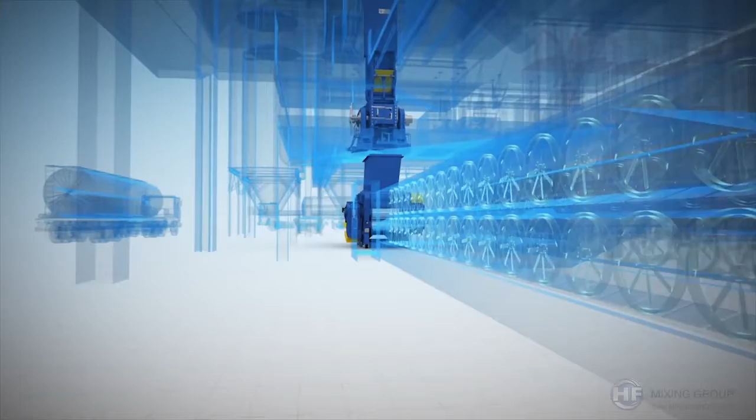In today's business world, only the best technology will ensure you stand out from the competition.

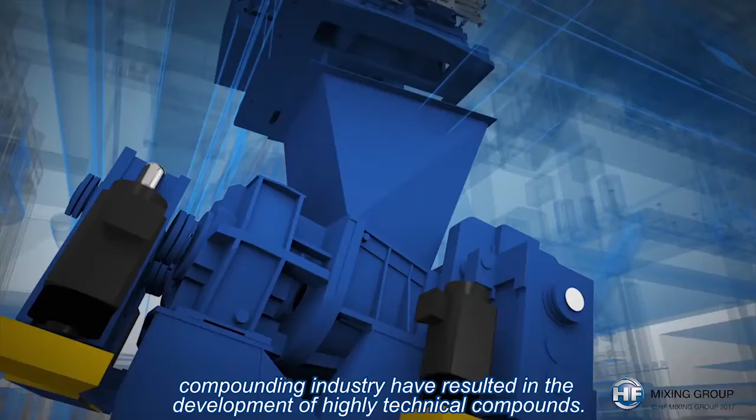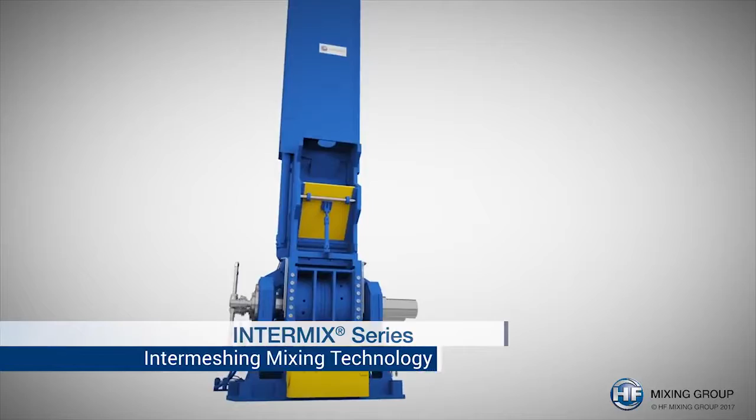Since the internal mixer was developed in 1916, the demanding requirements of the compounding industry have resulted in the development of highly technical compounds. HF Mixing Group continuously developed the Banbury, Intermix, Tandem, and Universal Mixer U-Mix to ensure that these compounds can be produced to a consistent high quality at the lowest cost.

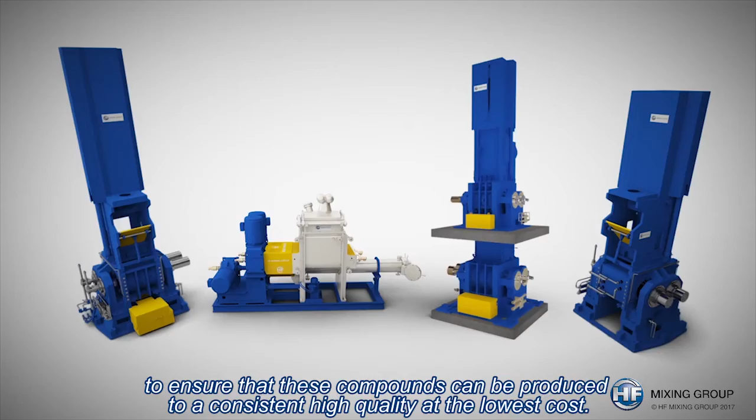HF Mixing Group aimed to give you a total solution for your mixing room requirements, from the best equipment for each individual step of the process through financing, project management, project engineering, integrated automation, and site coordination.

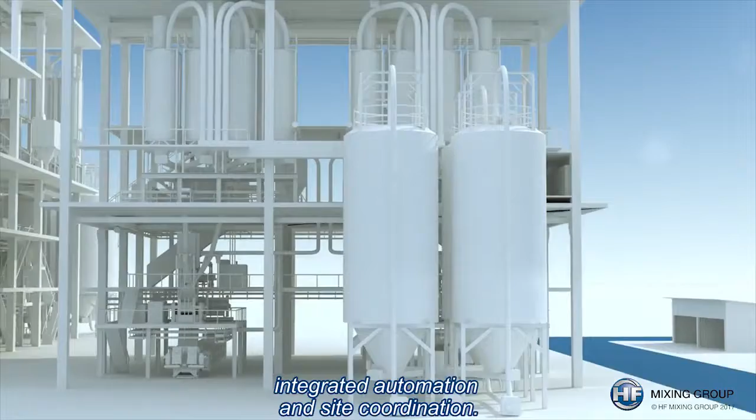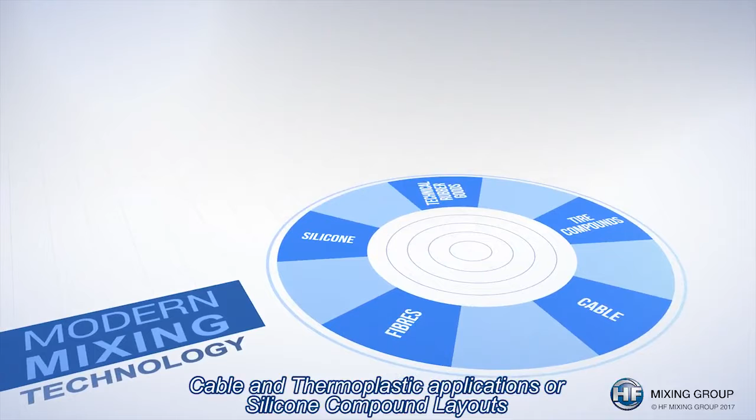Whether for the tire industry, technical rubber goods, cable and thermoplastic applications, or silicone compound layouts equipped with universal mixers, the central point of any mixing room layout is modern mixing technology.

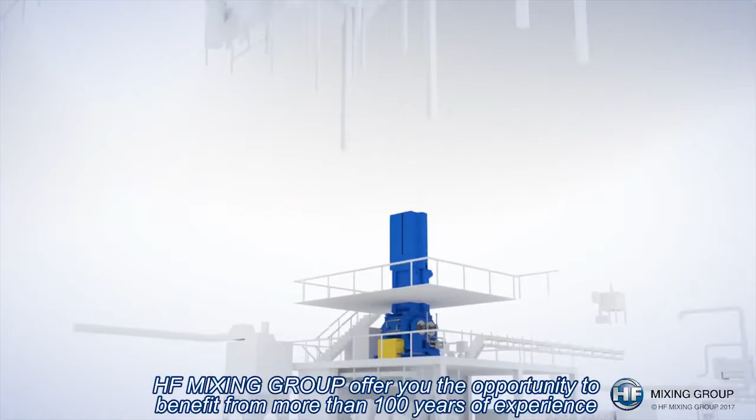HF Mixing Group offer you the opportunity to benefit from more than 100 years of experience in building the heart of mixing procedures, the mixer.

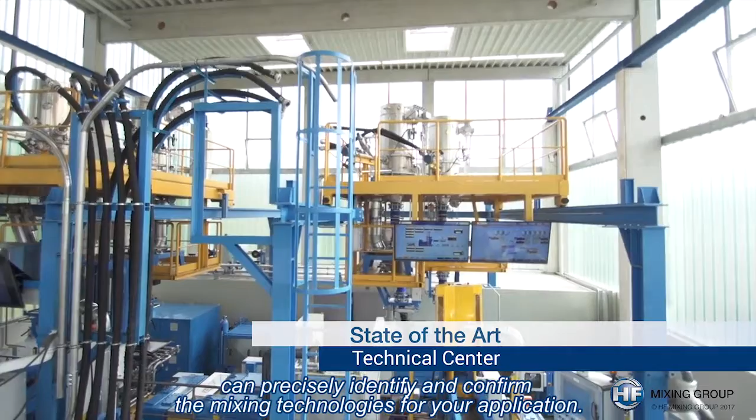Our state-of-the-art technical center in Freudenberg, Germany, based around production-size scalable equipment, can precisely identify and confirm the mixing technologies for your application.

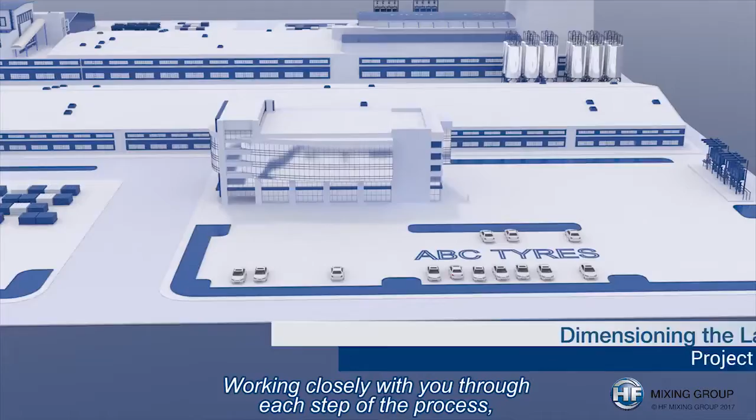Working closely with you through each step of the process, from raw material delivery to finished compound, number of passes and the respective volumes for your materials, we can identify the individual machine parameters and size the mixer, as well as the complete mixing room.

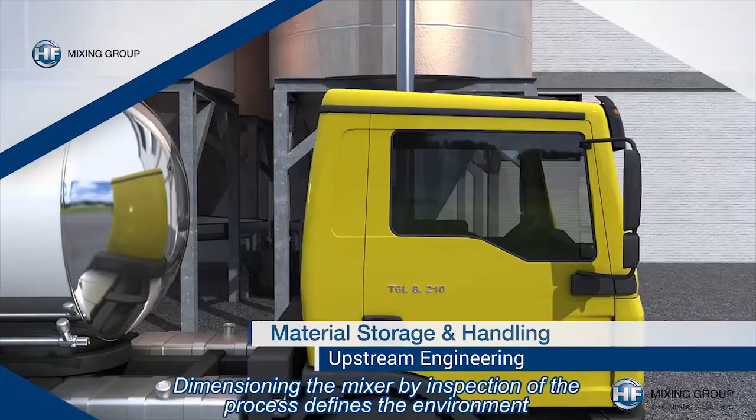Dimensioning the mixer by inspection of the process defines the environment and the specific requirements for up and downstream equipment. Each process, whether in advance or subsequent to the mixer, should be limited by the frequency of mixing.

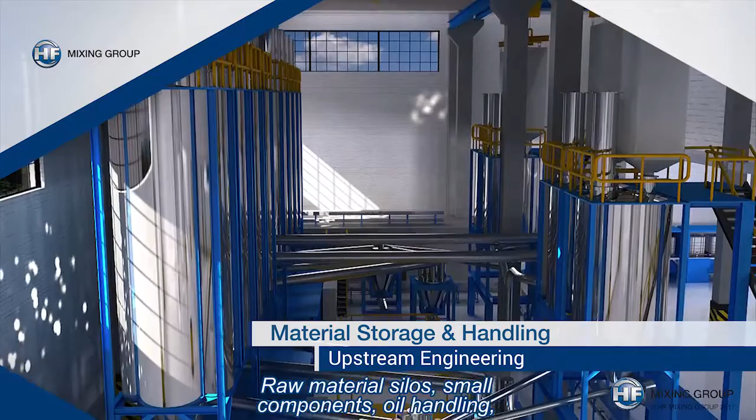Raw material silos, small components, oil handling, weighing and feeding of polymer bales or master batch compounds. The aim of upstream engineering is to analyze the characteristics of the different raw materials and to determine the best solution for a careful raw material handling system.

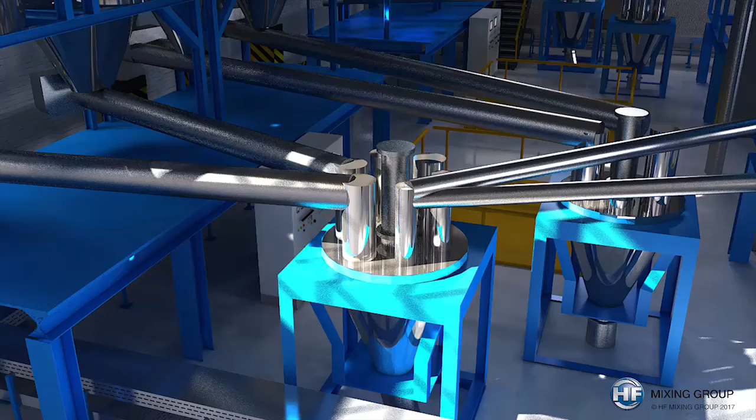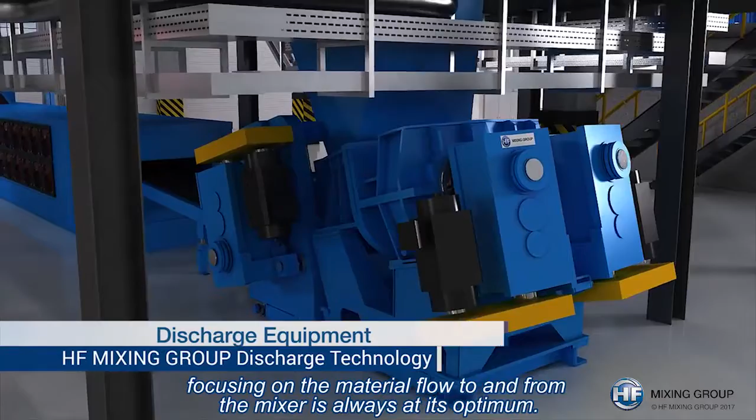Dimensioning of upstream equipment by inspection of the mixing process provides the basic demands for the downstream equipment, focusing on the material flow to and from the mixer being always at its optimum.

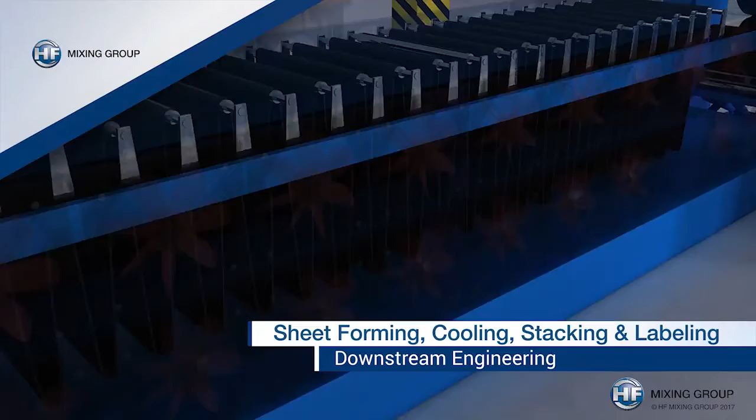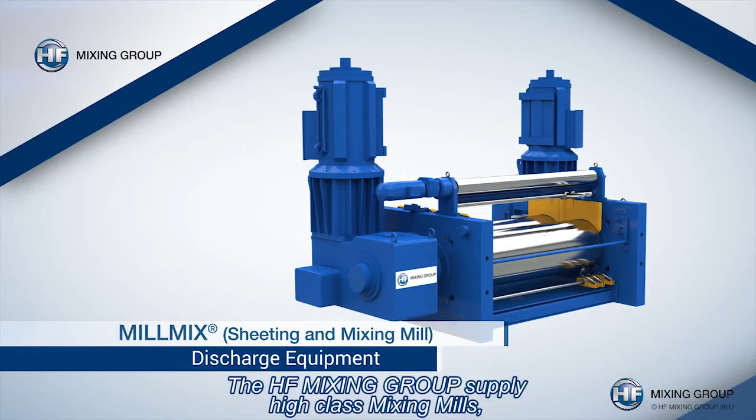HF Mixing Group supply high-class mixing mills, twin and single-screw extruders, batch-off units, and pelletizing solutions to guarantee the required quality for further compound processing in the downstream area.

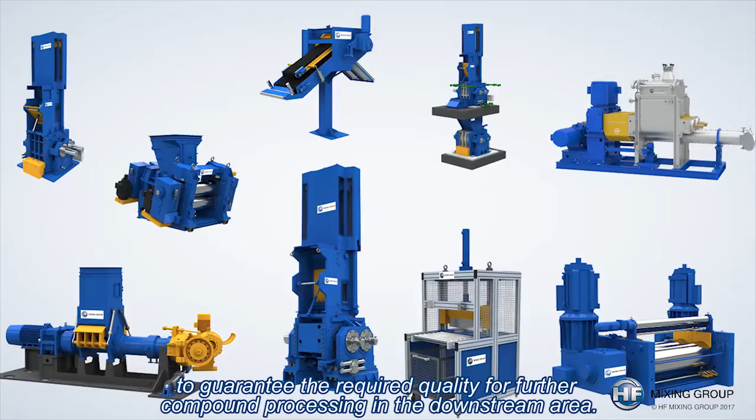Once the equipment has been correctly sized and the process flow has been determined, we can look at the line layout in 3 dimensions so that the process can be easily understood by everyone involved.

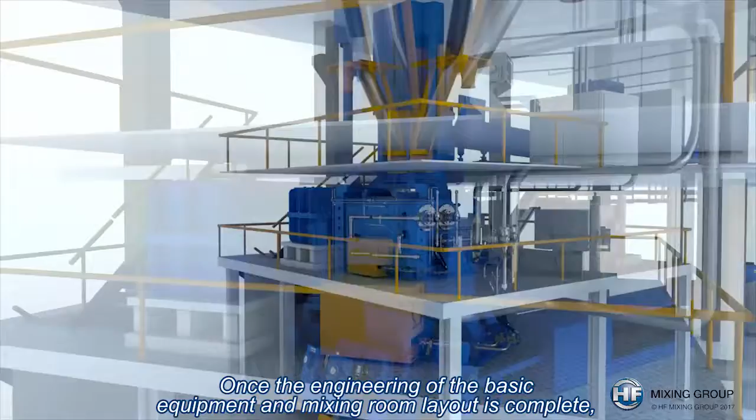Once the engineering of the basic equipment and mixing room layout is complete, we can start to look at engineering the cable trays, water, air and lubrication pipework, dust extraction, and venting systems. The basic engineering work linking each aspect of the mixing line is now complete.

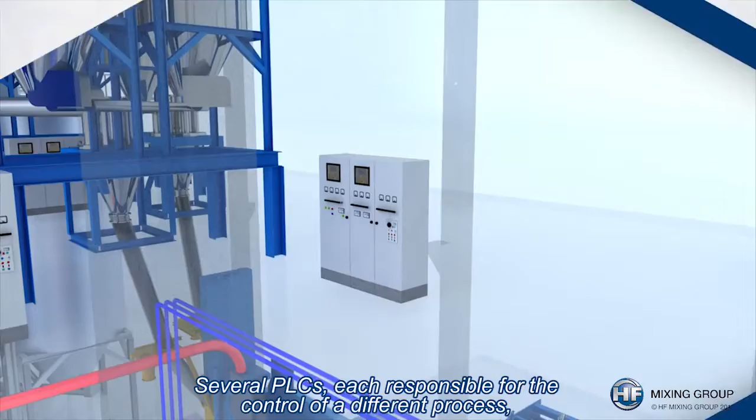Several PLCs, each responsible for the control of a different process, need to be connected to one another to ensure a highly efficient team play between the different machines and equipment in the mixing room areas.

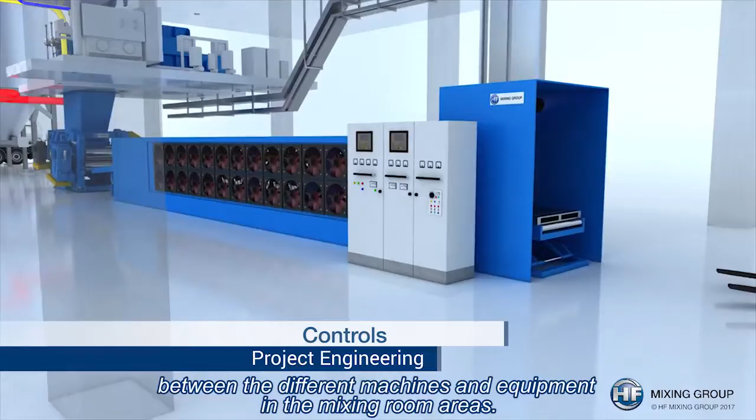Each piece of the puzzle of an integrated automation solution needs to be placed in the production process at the correct level. HF Mixing Group provides, through Advise, a standard parameter-driven software package giving you the opportunity to control each level of the process with pre-engineered software solutions, from the equipment to the interface to any well-known or customer-specific ERP systems.

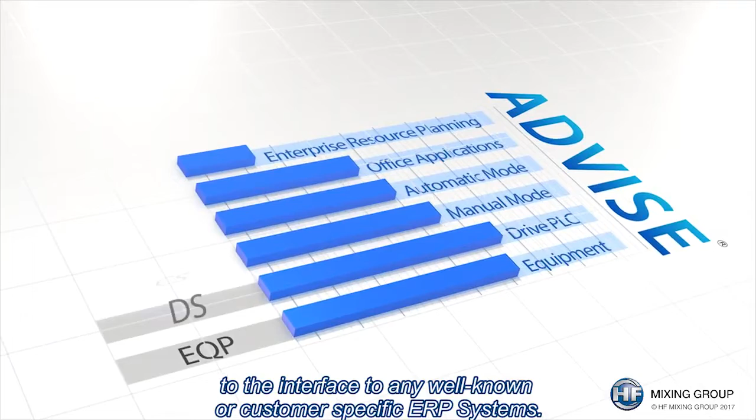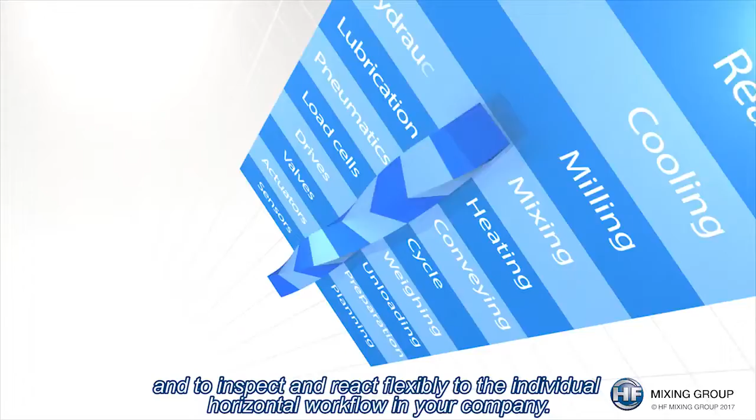The goal of the HF Advise system is to structure the process of automation based on defined vertical control levels and to inspect and react flexibly to the individual horizontal workflow in your company.

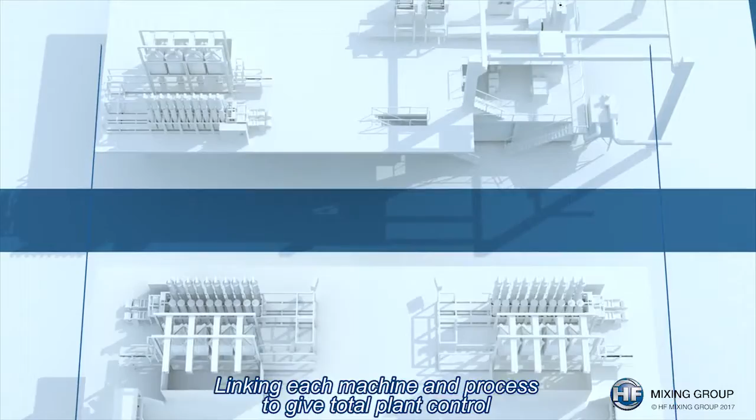More than 40 years of experience in software solutions for mixing processes gives us the ability to offer you a customized system based on specific rubber industry knowledge. Linking each machine and process to give total plant control can be summarized in 3 words: concept, connect, and control.

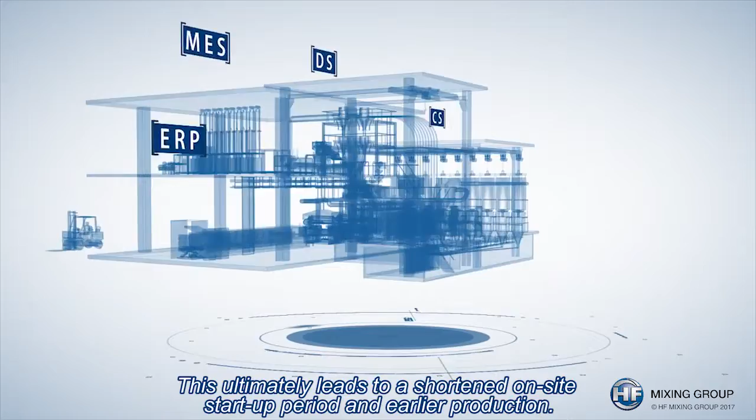Using the HF Mixing Group as a single main contractor allows the interfaces between the different processes and equipment to be standardized and effectively less costly, with a further advantage of being able to simulate the automation system at the engineering phase. This ultimately leads to a shortened on-site startup period and earlier production.

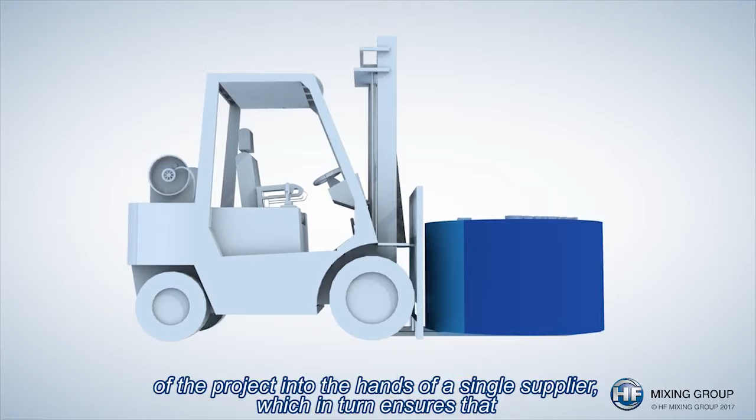Project management brings all the required resources, time, costs, and quality of the project into the hands of a single supplier, which in turn ensures that we aren't just planning the work, but that we are working the plan.

Each step of the project must be examined in detail and may require a multitude of disciplines: mechanical, hydraulic, electronic, programming, organization, etc.

Project management ensures that costs, quality, and time are carefully kept in focus and that the results are predictable and reliable.

Providing assistance in analyzing your mixing room, project management and engineering, including integrated automation, training, site coordination through installation and startup, and finally, international certification. These are the goals of HF Mixing Group, the world's leading producer of equipment for high-quality mixing solutions.

Furthermore, the HF Mixing Group offer already pre-engineered solutions for several mixing line layouts, master remill and final production, technical rubber, cable and thermoplastic compounds, or solutions for production of silicone compounds.

It would give us great pleasure to start the discussion with you about your upcoming mixing room projects. HF Mixing Group, your partner for mixing room turnkey projects.